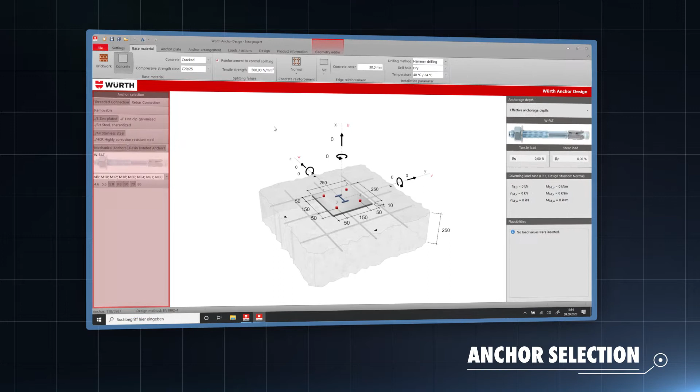The WURTH Anchor Design Software is fast, secure, and easy to use. After opening the Anchor Design Software, the user interface with its simple design pops up. On the left-hand side, you can select your preferred anchor system.

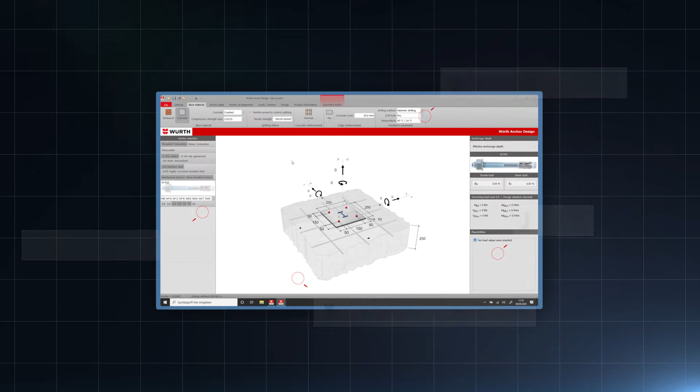In the 3D model, you can easily define the geometry and insert the loads. On the right-hand side, an automated result shows whether the anchor design is possible with the inserted input data. Here you can adjust all detailed settings. There are many different settings to find the right anchor, not only for standard, but also for special assortment solutions.

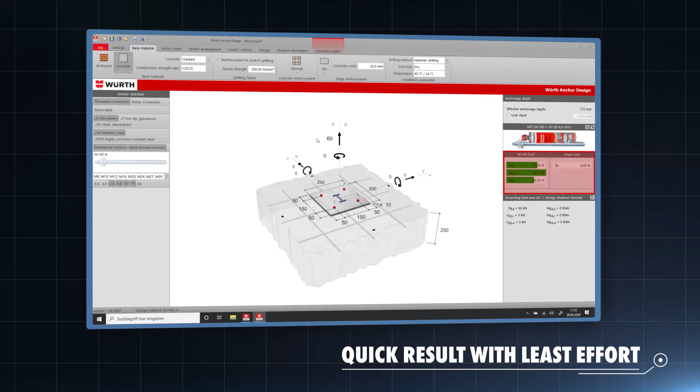But how can you quickly find an economical solution with as little effort as possible? By entering the load in the 3D model, the WURTH Anchor Design Software automatically calculates a result with the most economical product. The visualization of the anchor utilization with green-colored bars notifies the user right away whether his or her design is successful.

If the most economical solution is not the desired one, the user can easily choose an alternative anchor system by clicking on the product picture on the left column of the screen. A list with anchors pops up, and the user can select the desired alternative.

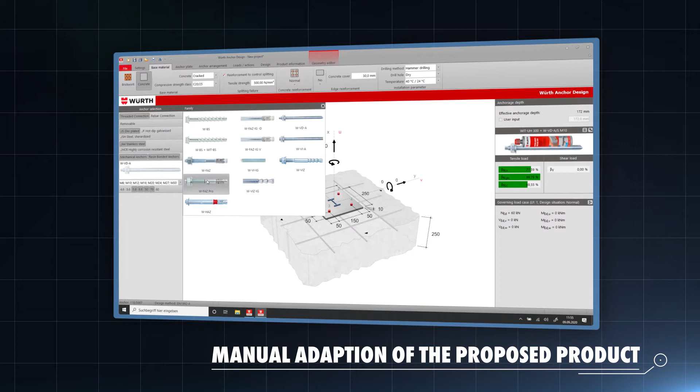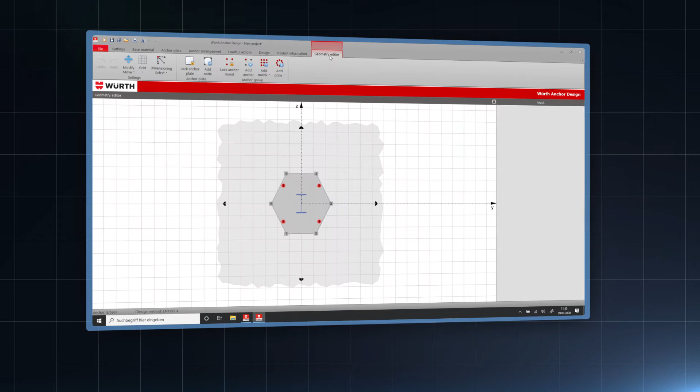A function that is quite useful in practice is the Geometry Editor. By clicking on the Geometry Editor tab in the ribbon on top, the Geometry Editor mode is activated. In this screen, you can easily add nodes to the anchor plate to modify the geometry according to the exact real-time situation.

Additionally, the number and position of anchors can be modified as well. This can be very useful for challenging projects with special needs.

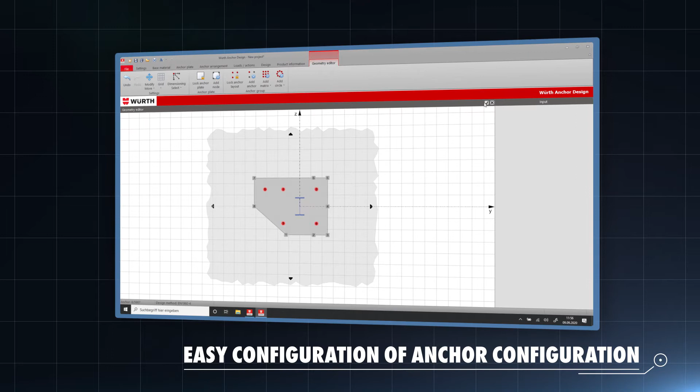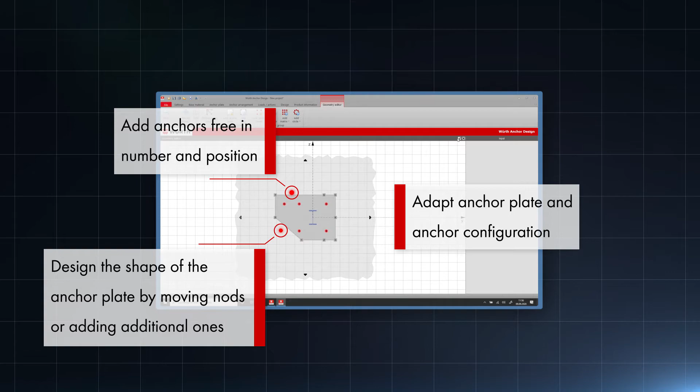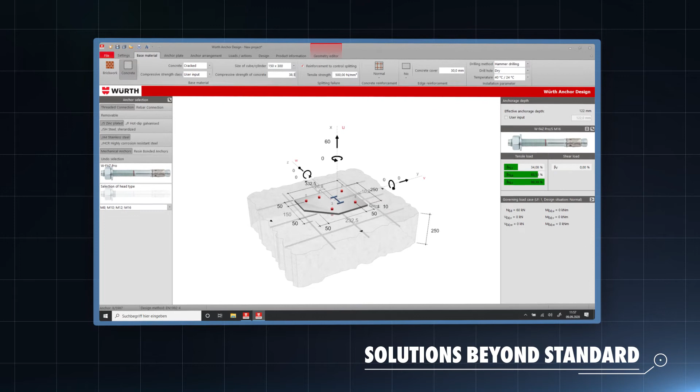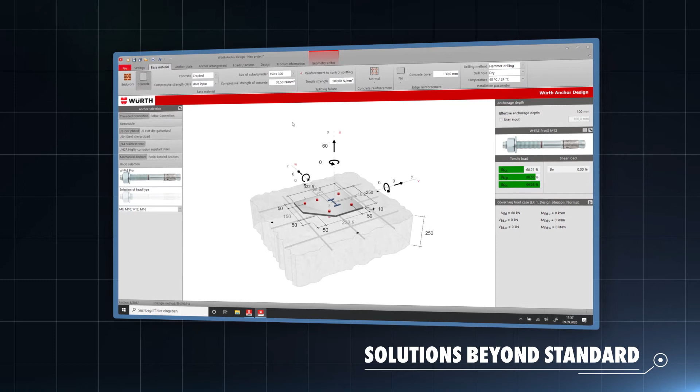In some situations, the user is met with the challenge that the concrete strength class on site doesn't correspond to the standard scope of approvals and design guidelines of anchors. To overcome this problem, the user can freely choose the compressive strength of the concrete by entering the value from a site test, a laboratory, or a project specification. This function is especially useful in renovation projects.

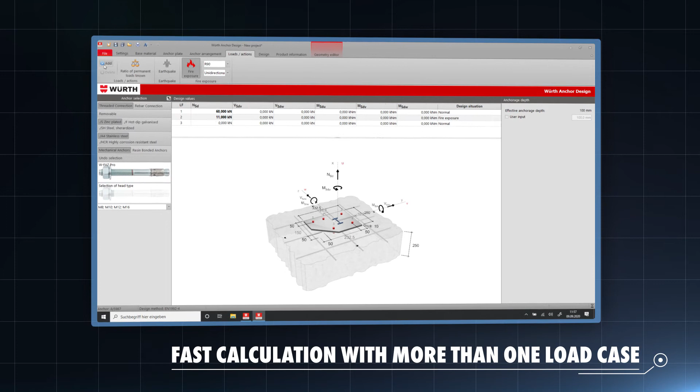After clicking on Loads Actions, it is possible to insert different load cases. The software automatically chooses the governing load case. In addition, special load combinations for fire or seismic loads can be considered. You can directly see which load case is governing. It is shown on the lower right column.

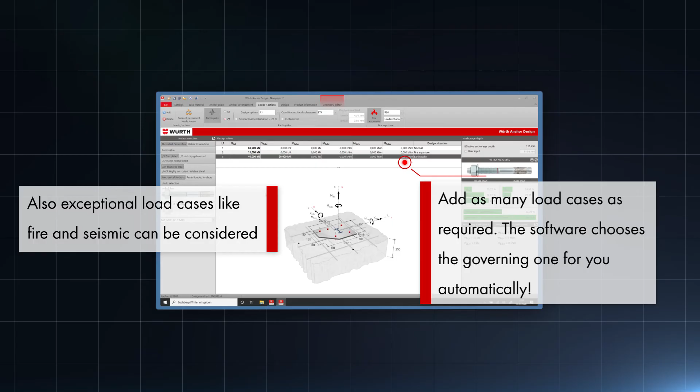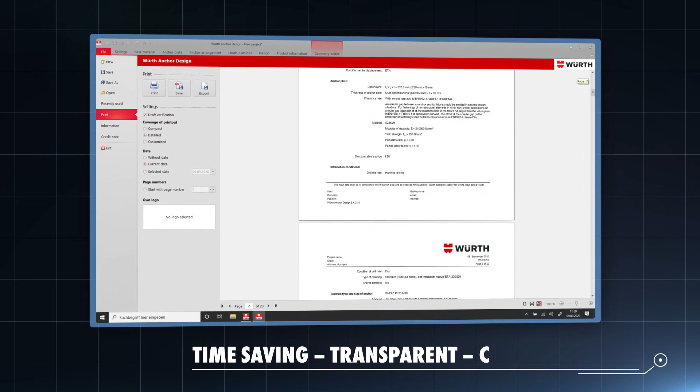Clicking on the Print button, a printout that includes the design method, steps and results is generated. This printout can either be printed in detailed or compact version, depending on the required level of detail. Designers and engineers especially appreciate the detailed printout version as it thoroughly goes through the design process in a step-by-step approach.

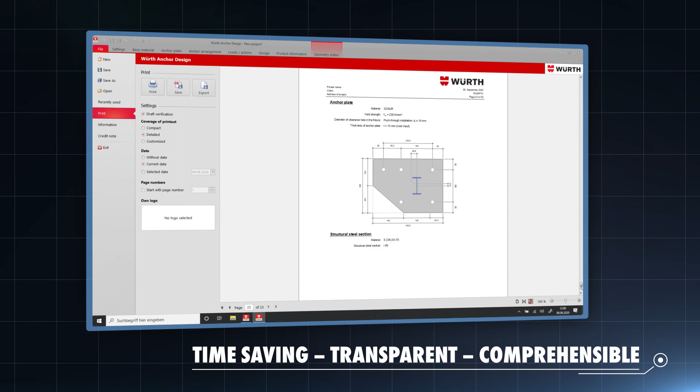The arrangement, depth of the drill holes as well as the measurements of the anchor plate are included in the printout to ensure correct production of the anchor plate and installation of the anchor system. All the above make the printout valuable for engineers, construction companies, and installers.